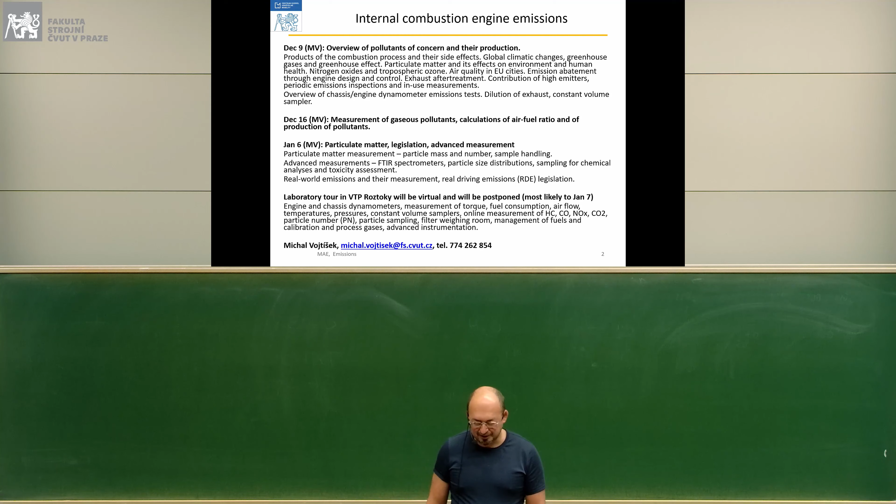Just for an overview, third lecture will be after the holidays on January 6th on advanced measurement, particulate matter, whatever we don't cover today, and on legislation. I am not quite sure how we will arrange for laboratory tour in Roztoky. We will record it on video camera with some commentary and make that available to you, and I will be available for discussion. I don't know where this will be, so please bear with us.

Last time we talked about why do we care about emissions. Since this lecture was recorded, I will not go over it again.

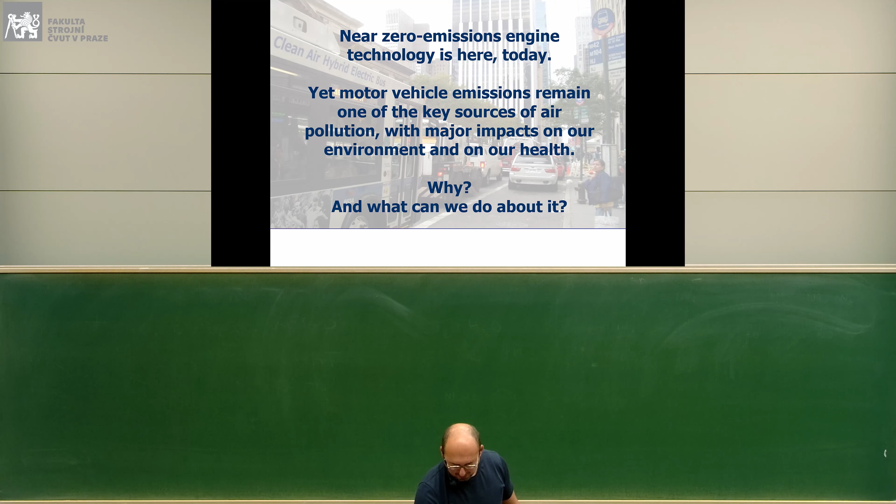Maybe briefly. Particulate matter is responsible for premature death of about 1 out of 1,000 people, with large losses, economic, several percents of gross domestic product.

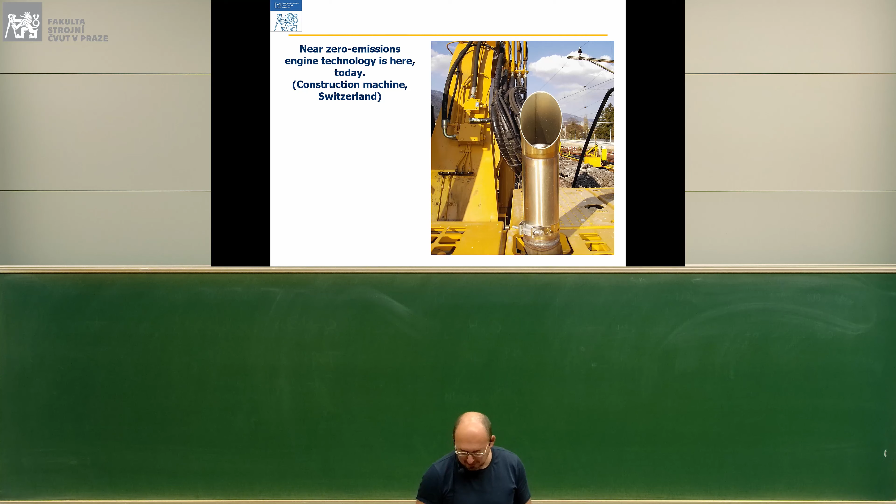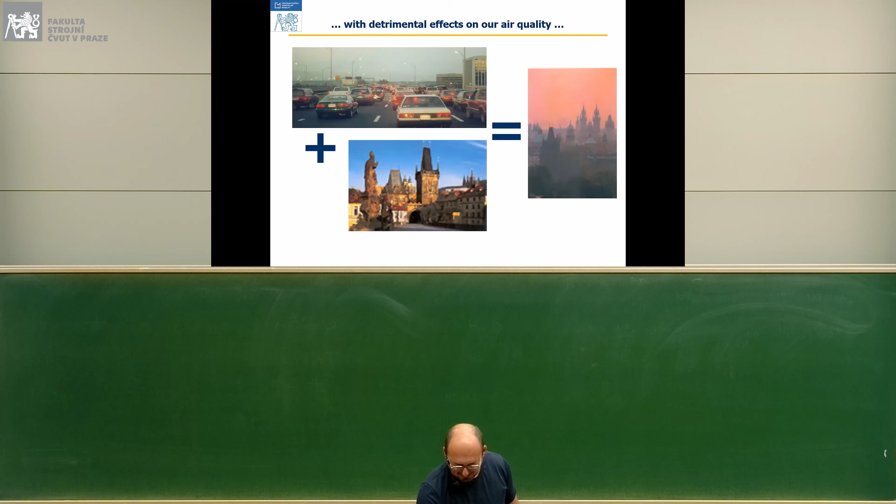And we do have technology that allows us to achieve very low emissions, and we need to make sure that we use the best available technology. We look out for incidental creation of pollutants that could be of concern, because transportation, mobility is part of freedom. It's a useful thing, and at the same time we do care about our health.

The main problematic pollutants are particles, oxides of nitrogen created at very high temperatures and pressures in a combustion chamber, and those are the 2 main categories. Sulfur, sulfuric acid, lead, benzene, CO. They are much less and less of a problem because of technological advances.

We have new emerging pollutants: nitrogen dioxide created in exhaust after-treatment devices, ammonia created during reduction of nitrogen in catalytic devices, new pollutants like aldehydes associated with oxygenated fuels, especially alcohols. And greenhouse gases are not just carbon dioxide, but also methane, produced by engines that run on methane or methane-containing fuels, natural gas, biogas, pyrolysis gas, sewage sludge gas, and also nitrous oxide N2O, which is not harmful to our health. It is chemically very stable, but it is a very potent greenhouse gas, and its production is associated with some NOx reduction catalysts, selective catalytic reduction and NOx trap.

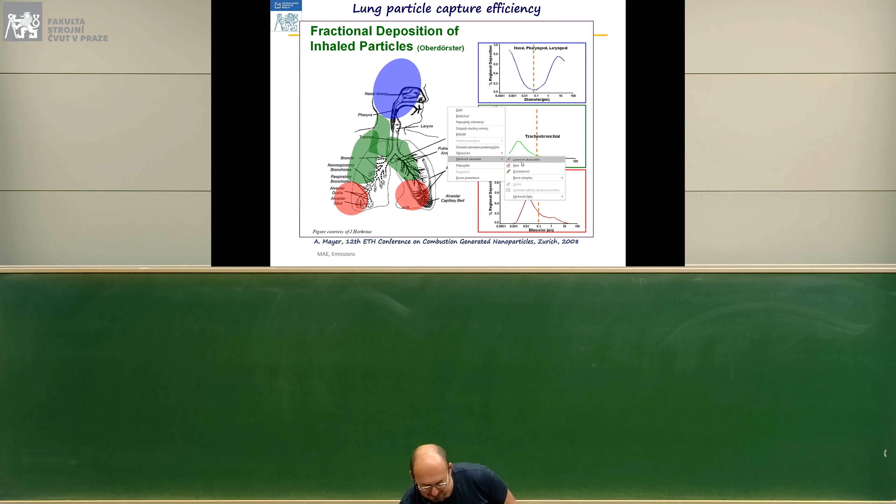Particles produced by the engines are very small, on the order of 10 to 20 nanometers, and then aggregates of larger particles, and that size deposits very readily in human lung alveoli. That's why small particles are dangerous.

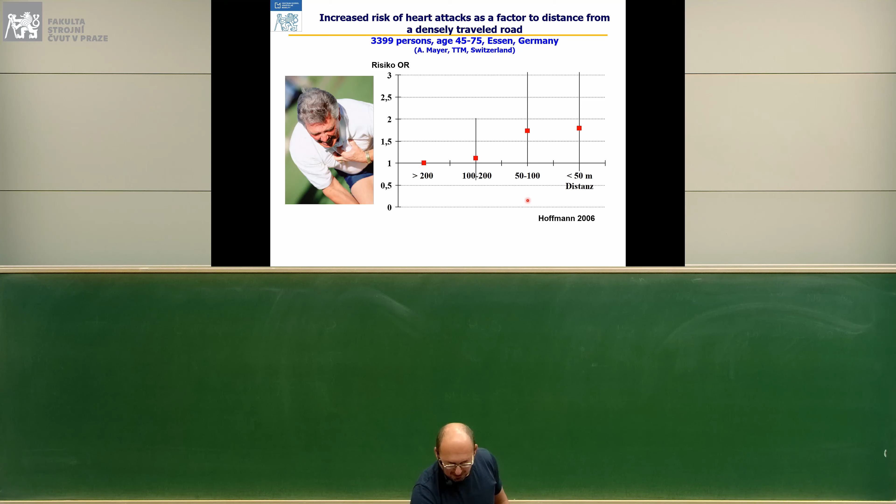Emissions are usually concentrated within tens, maybe hundreds of meters from heavily traveled roads, and those who are frequently near heavily traveled roads have higher risk of various ailments.

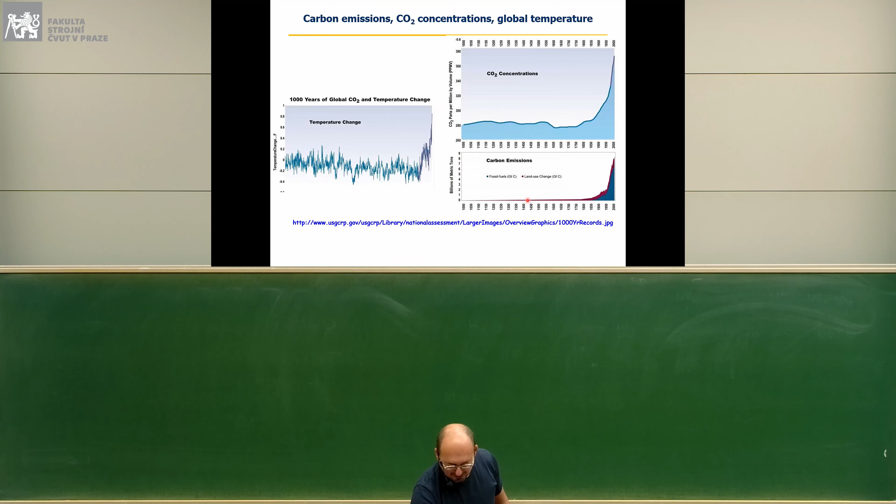Greenhouse effect, rising CO2 concentrations, greenhouse gas emissions, fraction of transport. So, reduction by better fuels and technologies.

Just a review, we run mostly on hydrocarbon fuels, so ideal combustion results in carbon dioxide and water. In reality, incomplete combustion or incomplete oxidation of fuel and lubricating oil leads to particulate matter comprised of elemental carbon and other solid particles, volatile and semi-volatile particles, sometimes referred to as organic carbon, and then we have volatile organic compounds in gaseous form termed hydrocarbons.

I would not call them unburned hydrocarbons because they are not just unburned fuel. They are a mixture of unburned fuel and various intermediate products of combustion, oxidation, pyrolysis of fuel. Then we have carbon monoxide.

Besides the engine burning fuel and lubricating oil, whatever else is in a fuel comes out in the exhaust. Whatever comes into the engine has to leave the engine, or it deposits in the engine, but that causes a lot of problems. So if we have metals and sulfur in a fuel and oil, it comes out through the exhaust, most of it.

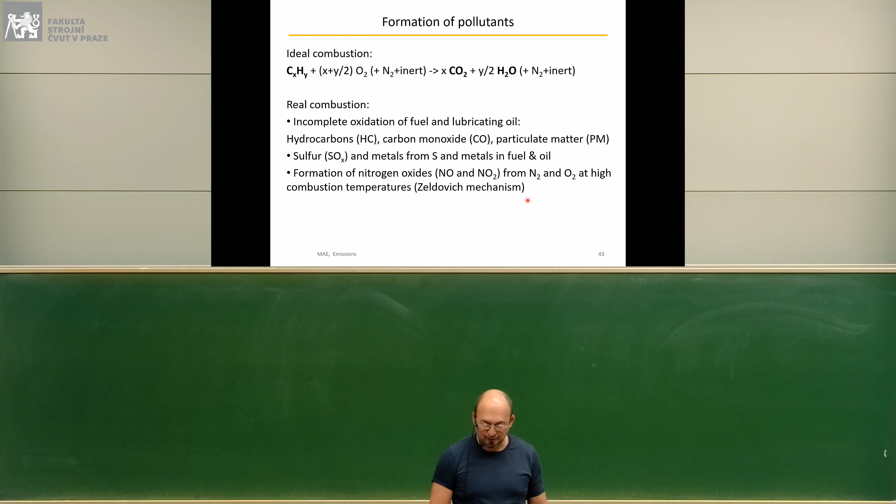That can change in engine after-treatment. We also discussed greenhouse gas emissions, CO2. CO2 is emitted no matter what hydrocarbon fuel you burn, whether you burn biodiesel or petroleum diesel. I exhale CO2. The difference between burning fossil fuels and renewable fuels is that with renewable fuels, CO2 gets taken from the atmosphere, it's bound as hydrocarbons in the plants, and during the combustion of biomass, CO2 is released, but it's a part of natural circulation of CO2.

Also, all the minerals that are in the plants, if the ash is returned, can be used as fertilizer, and leftover biomass could be used for heat, and you have a circular economy.

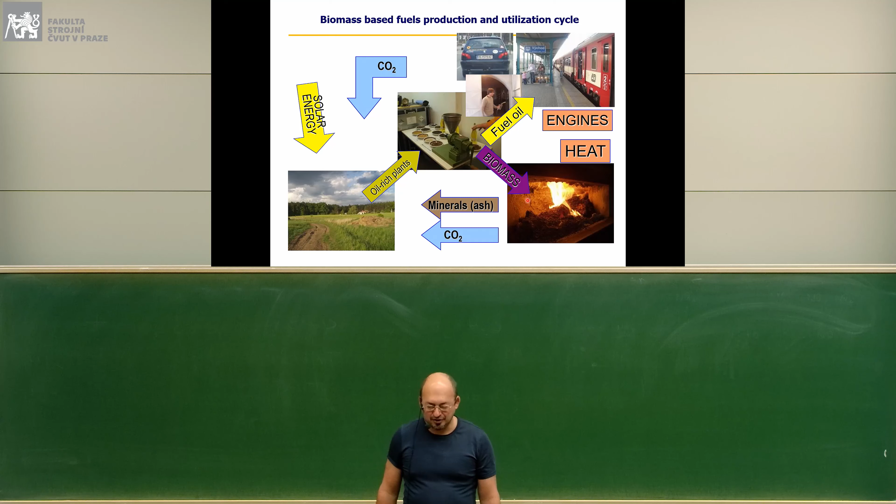Unfortunately, there is not that much land to supply us with enough biofuels that could replace our diesel fuel, maybe on the order of 10%.

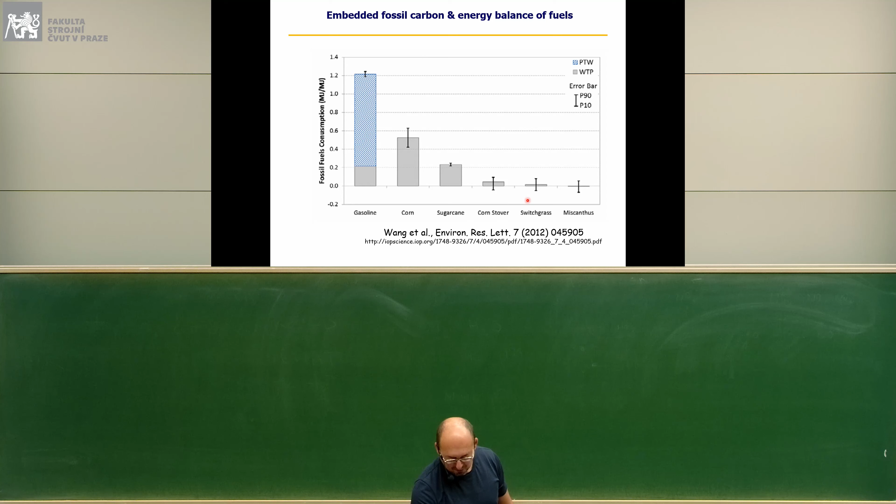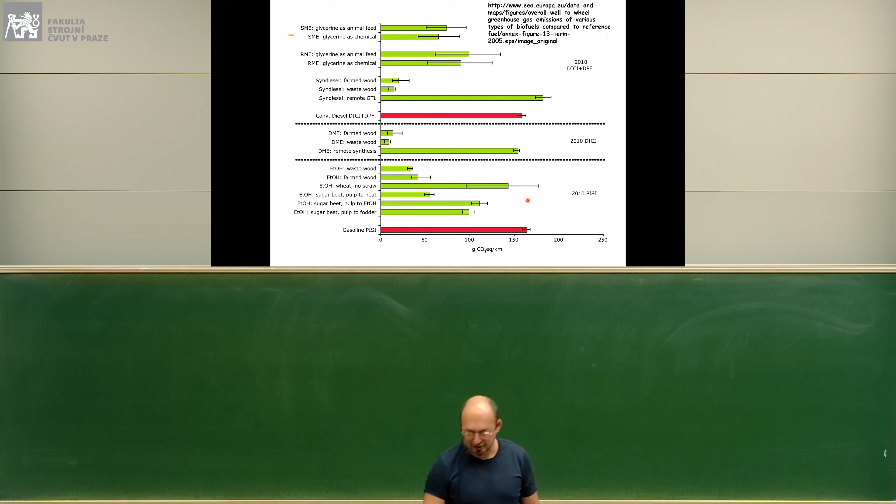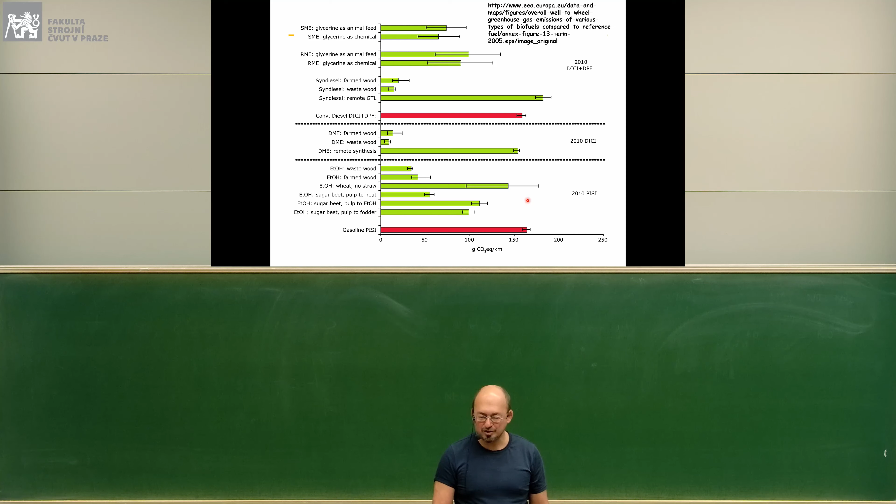We've talked about embedded energy in the fuels and well-to-wheel analysis of different biofuels. It's a subject of ongoing research, and the results are not very consistent. It is not a function just of a biofuel, but from what crops you produce that biofuel, by what process and under what conditions. And that results in tremendous differences.

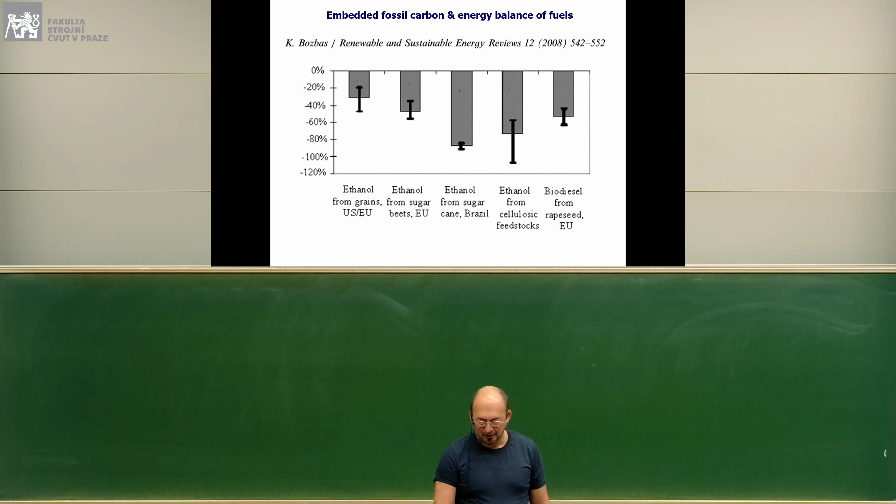But generally it is possible to produce both biodiesel and ethanol with net benefit in greenhouse gas emissions. Not always, you have to watch it.

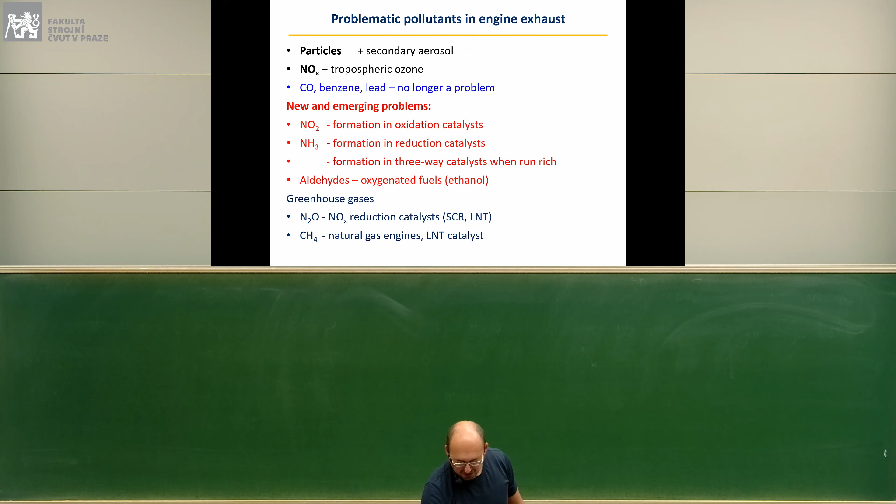So, emission reduction. The first great emission reduction was thanks to a three-way catalyst, and that was on gasoline engines in the United States. Those engines have produced more nitrogen oxides per mile or per kilometer than automobile diesel engines with no exhaust after treatment whatsoever. And those nitrogen oxides got very successfully reduced.

So in a three-way catalyst, we have hydrogen, which is in the exhaust, we have hydrocarbons, we have carbon monoxide, and then we have oxygen that's left in the exhaust, and then we have nitrogen oxide. And what happens in a three-way catalyst? Nitrogen oxides are reduced back to nitrogen and oxygen. That doesn't happen just as a magic by itself. It doesn't happen voluntarily. Actually, what happens is nitrogen oxides release nitrogen, and this oxygen is used to oxidize hydrogen, hydrocarbons, and CO. You get CO2 and water.

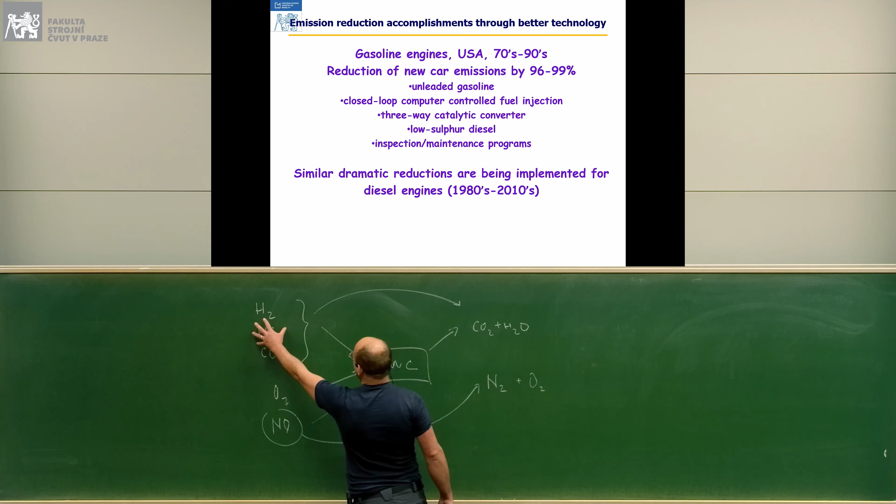So there are many processes happening. It spans hundreds of reactions. To simplify this, hydrogen, hydrocarbons, and carbon monoxide are oxidized to carbon dioxide and water. Nitrogen oxides are reduced back to nitrogen, and oxygen from the air is also used to oxidize hydrocarbons, hydrogen, and carbon monoxide. Now, very much depends on the stoichiometry

of the three-way catalyst. If there is no oxygen, well, after consuming all the oxygen from nitrogen oxide, I don't have enough to finish the oxidation of hydrogen, hydrocarbons, and CO. So, under rich conditions, we get hydrocarbons, CO. Most of the nitrogen oxide is reduced, but nitrogen is also reduced to ammonia. So we have a new pollutant that is being created under rich conditions.

Under lean conditions, these nitrogen oxides need something to be oxidized to take this oxygen away. So if there is not enough hydrocarbons and CO to take the oxygen away, some of the nitrogen oxides do not get reduced. So we have excess nitrogen oxides.

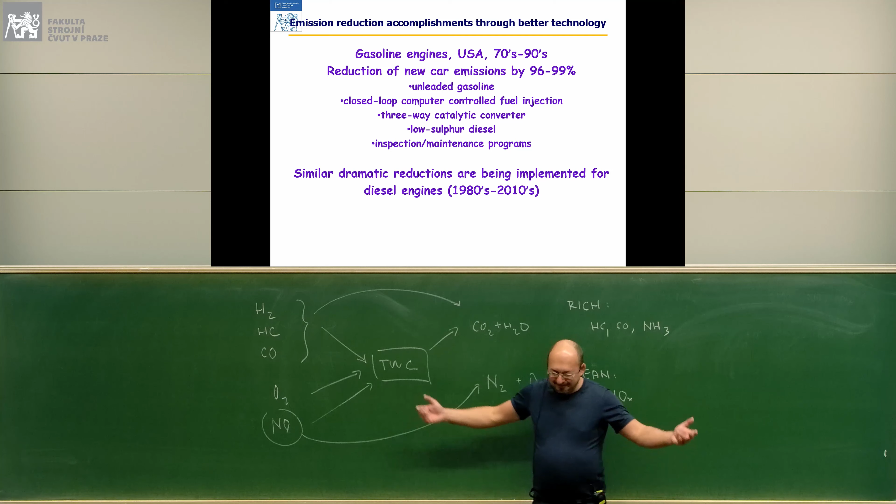What does it mean? What are the practical implications for testing? Well, we need to cover the regimes when the catalyst is cold, at the start of an engine, because a cold catalyst doesn't work. We also need to cover transient operation, during which you can depart from stoichiometric air-fuel ratio. Under steady state conditions with a warmed up catalyst, well, that's not as difficult to achieve very high efficiency. So cold starts and transient operations are challenging for design of such a system.

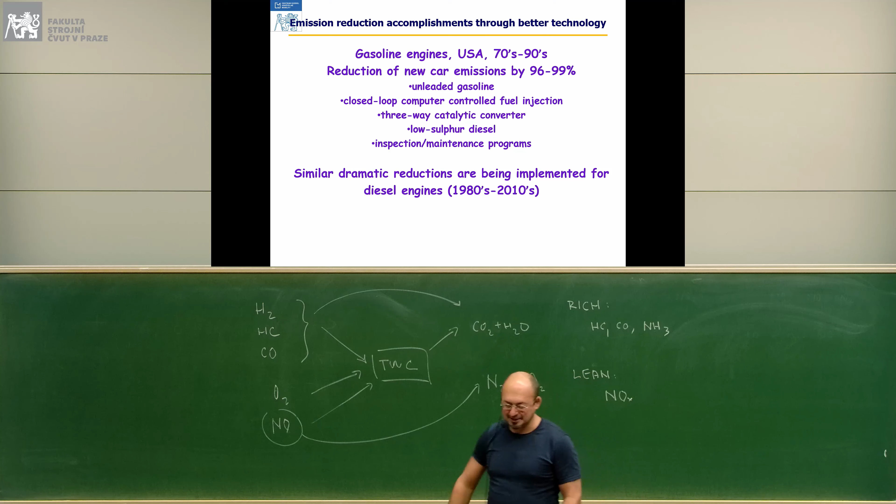And then in use, you have to make sure the air-fuel mixture is stoichiometric and the catalyst is working. And that's why we have inspection and maintenance programs. That's why we have remote sensing that's measuring emissions of vehicles as we go. Now, similar things are happening with diesel engines.

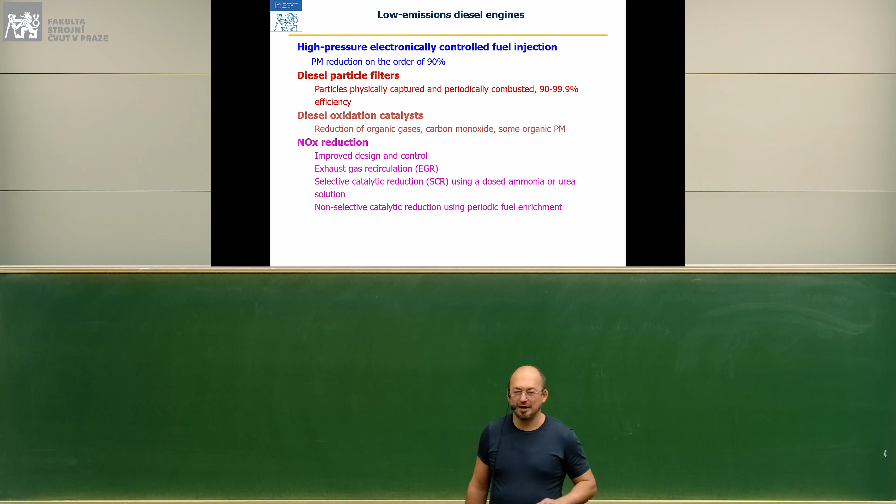With nitrogen oxides, we reached the limits of combustion control without unreasonable fuel penalties, and now most modern engines use after-treatment: non-selective catalytic reduction, NOx storage and reduction catalyst, and selective catalytic reduction using a reducing agent, most likely ammonia. So far, most likely that ammonia is created by thermal decomposition of urea in the exhaust.

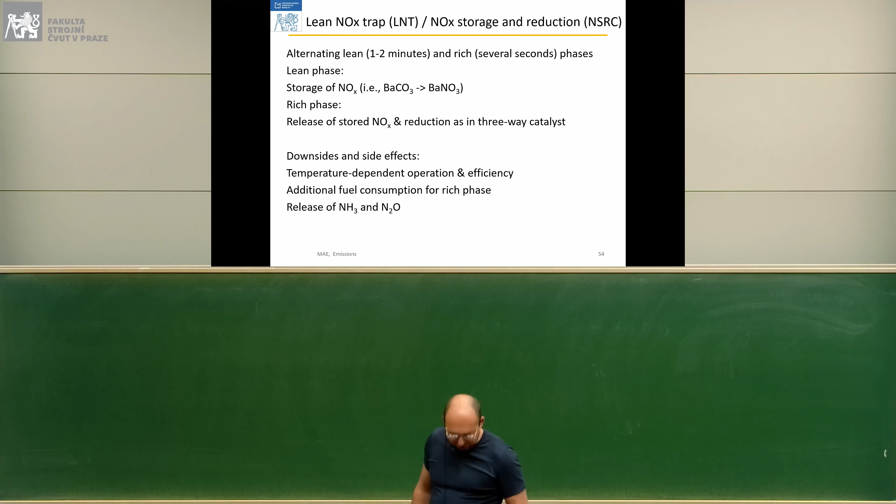Other solutions are emerging. We have lean NOx traps as one of the means to reduce nitrogen oxide emissions, and those function like a combination of a three-way catalyst and a NOx storage. NOx storage is accomplished by chemical transformation. For example, barium carbonate, which is in the catalyst, is changed to barium nitrate.

NOx is captured and CO or CO2 is released, and that's during the normal lean burn operation of the engine. Periodically, you have to do something with the nitrogen oxides you have stored, because otherwise you would reach the storage capacity of the catalyst, and that's it. It's just like when you are wiping up water or coffee you spilled with a rag, and periodically you have to wring it to remove the water, otherwise it's not efficient.

So periodically you run the engine rich. What happens is you increase exhaust gas temperature, there are high concentrations of carbon monoxide in the exhaust, and under those conditions NOx are released from the storage, barium nitrate turns back to barium carbonate, and NOx are reduced by excess CO and hydrocarbons and hydrogen, just like in a three-way catalyst.

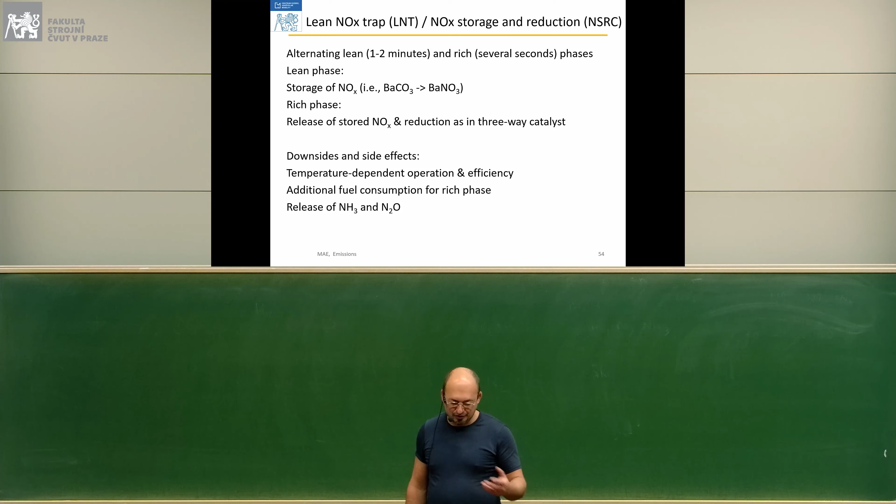There are some side effects, some downsides. One of them is increased fuel consumption. You need extra fuel to create rich conditions to reduce nitrogen oxides. Also, ammonia and nitrous oxide can be produced.

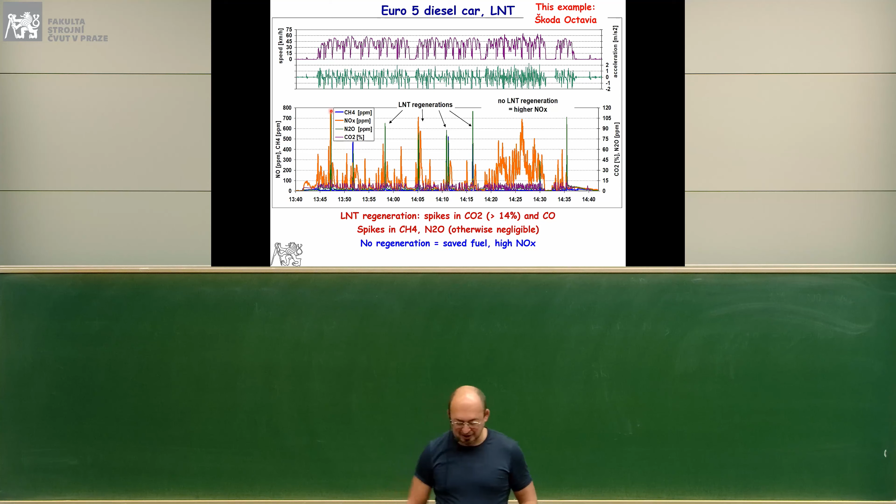You can see during regenerations you have peaks of carbon dioxide during fuel-rich operation. You also have peaks of methane. Unburned fuel is oxidized to CO2 and water, but methane is not, because it requires a higher temperature to be oxidized than the catalyst provides, so you can see spikes of methane. You can also see spikes of N2O, nitrous oxide, that is created during regeneration. And here, there you have regeneration.

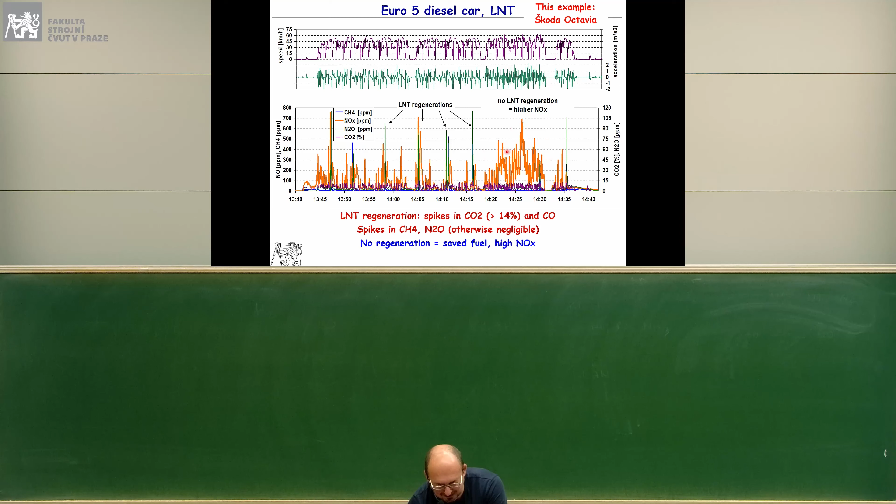Now this shows more dynamic driving, not higher speed, but higher dynamics. You see more decelerations and accelerations, maybe even a little more towards moderate than mild accelerations. And regeneration of the lean NOx trap does not take place here. You can see the emissions of nitrogen oxides gradually rising until regeneration again.

Selective catalytic reduction is an old, well-known process from stationary combustion control. Selective catalytic reduction means it reduces what you want to reduce without much reaction with something else, and that happens with a reducing agent, which in this case is ammonia.

Ammonia can be stored in liquid form and metered into the exhaust. It can also be stored absorbed in some material in solid phase and released by heating it up. Ammonia can also be produced in a three-way catalyst under fuel-rich conditions, but the easiest way used so far is to use water urea solution, which is liquid until about -10 degrees C.

When you inject water urea solution into the exhaust, it decomposes first through isocyanic acid, which then decomposes to CO2 and ammonia.

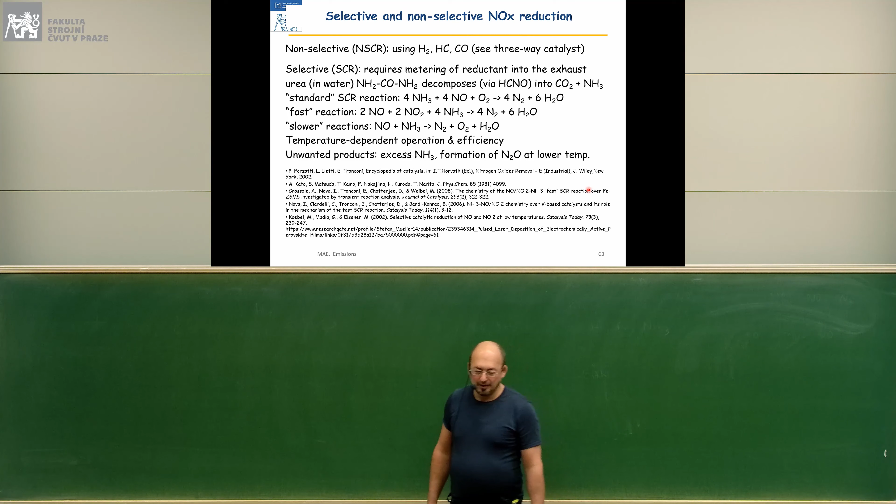So you have an engine with exhaust, a diesel oxidation catalyst, diesel particle filter, then metering of urea, or urea water solution known as AdBlue - that's a commercial name, and in the US they describe it as diesel exhaust fluid. And then you have an SCR catalyst.

In an SCR catalyst, many reactions are happening. To simplify this, ammonia reacts with nitrogen oxides: ammonia is oxidized, nitrogen oxides are reduced. The fastest reaction is when you have roughly the same amount of NO and NO2, and other reactions involving just NO or just NO2 are considerably slower. So it is beneficial to have higher concentrations of NO2 coming into an SCR.

You have to be very careful about chemical balance. If there is not enough ammonia, you have unreduced nitrogen oxides coming out. If you have excess ammonia, then you have ammonia coming out. Sometimes, because nothing is ideal, at a balance point you get some nitrogen oxides unreacted and some ammonia slip. And under some conditions, on some catalysts, you have nitrous oxide.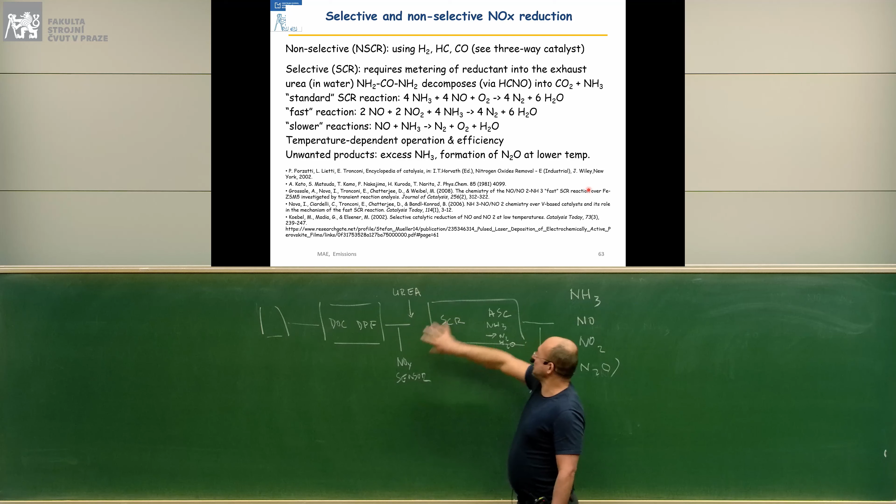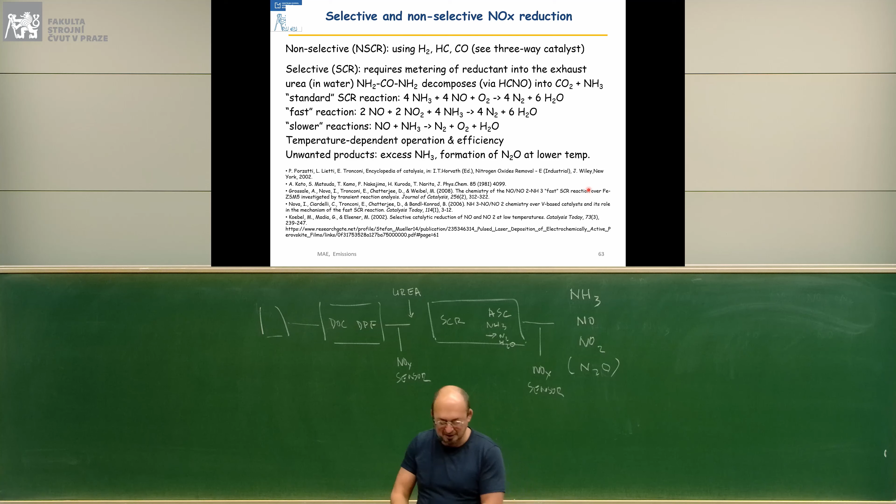This is the typical heavy-duty diesel engine after-treatment: diesel oxidation catalyst, diesel particulate trap, urea injection, selective catalytic reduction, ammonia slip catalyst. This allows you to reach very low emission levels, maybe even lower than on most passenger cars that drive on the road today.

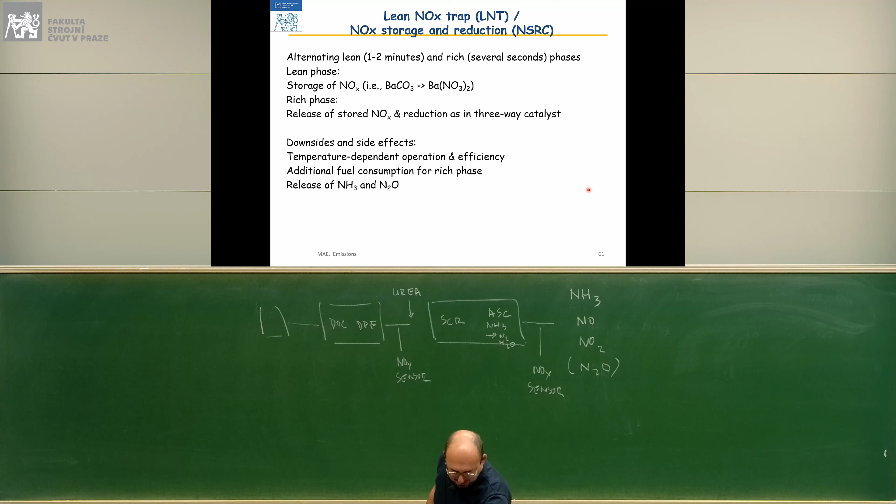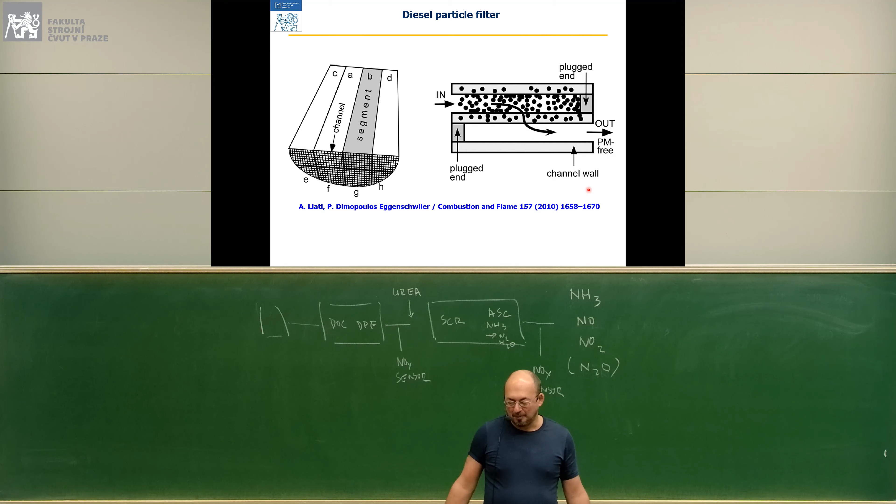And then we have the diesel particle filter, where you have channels just like in an oxidation catalyst, but those channels are capped on one end or another. So through the inlet channel, particles come in, and on the outlet channel, clean or particle-free exhaust comes out.

This is how it looks under an electron microscope. What's called a soot cake is a layer of carbonaceous particles that are trapped by the filter. So the particles are not trapped as much in the body of the filter, in the porous walls, because the pores in a porous wall are much larger than the particles. It's just like when snow is falling on a grid of a manhole on a sidewalk.

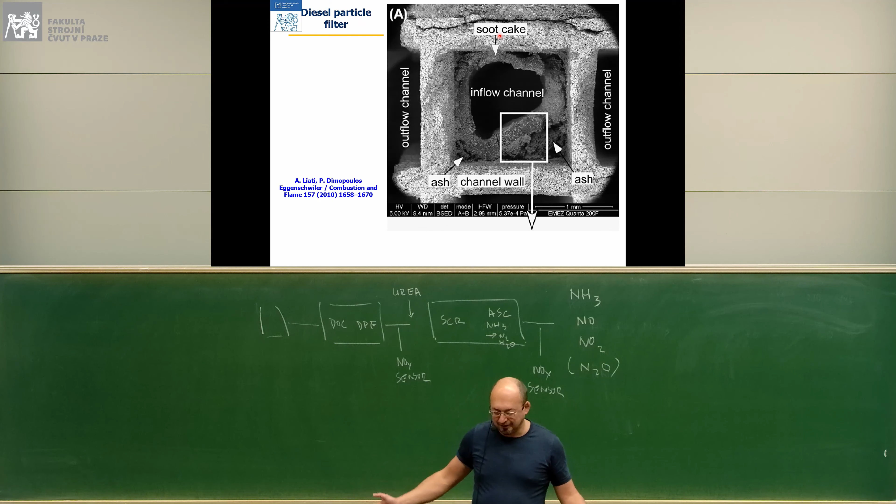The snowflakes are smaller than the openings, but as soon as a layer of snow builds up, then that's it - the filtration is almost absolute. During that time, the concentrations in a vehicle exhaust of particles - this is multiple runs with a heavy-duty truck just outside of Prague, about 8 years ago - are even smaller than the background urban concentrations. When we left this truck with the engine off, but with the analytical instruments still on during lunch, for that period the particle concentration measured was about an order of magnitude higher, because the instruments were sampling from the exhaust, so outside air was drawn into the tailpipe.

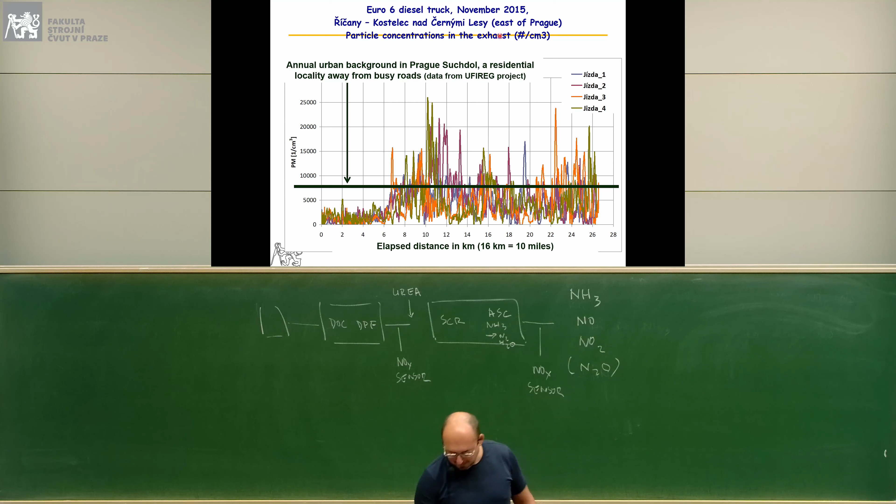So, very efficient device.

This is an example of data from a city bus driven for about 45 minutes, Braunschweig cycle with some breaks - high NOx only until SCR is warmed up, after that NOx is very low. You can see some increased emissions of N2O, but generally you have units of milligrams per second. So imagine milligram per second - that's less than 100 milligrams per minute. You're on the order of 100-200 milligrams per kilometer for a city bus.

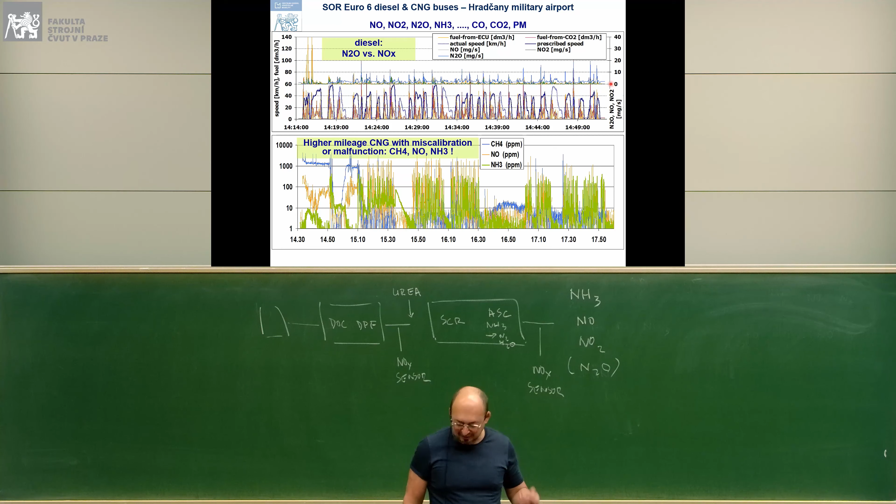Doesn't work all the time. We took a tractor trailer fully loaded, and for one week we drove it around Prague to look at the effects of congested traffic.

When the exhaust temperature drops below roughly 200 degrees C, the urea no longer decomposes in the exhaust, so no ammonia is produced. It's better to stop the injection of urea, and the catalyst efficiency starts dropping.

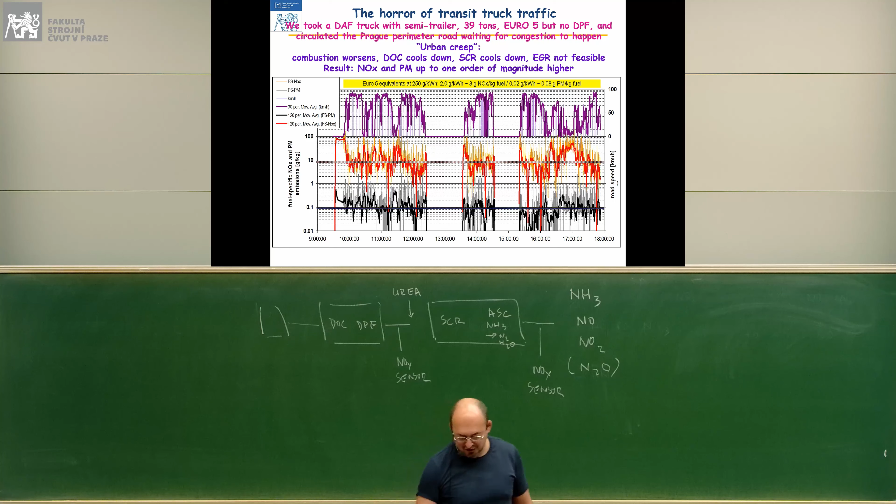Then NOx emissions per kilogram of fuel drop down an order of magnitude, but periodically they increase when average speed decreases, or after the lunch break when the catalyst is cold, and during driving through heavy congestion. So that's a technical limitation of SCRs.

When you think about what testing conditions you need to see if those technologies are working, you have to know something about those technologies, how they work. Cold start of an engine, low load operation, and transient operation need to be covered during any test to meaningfully assess whether this device is working under realistic conditions. If it's working under those conditions, it will also work under ideal conditions.

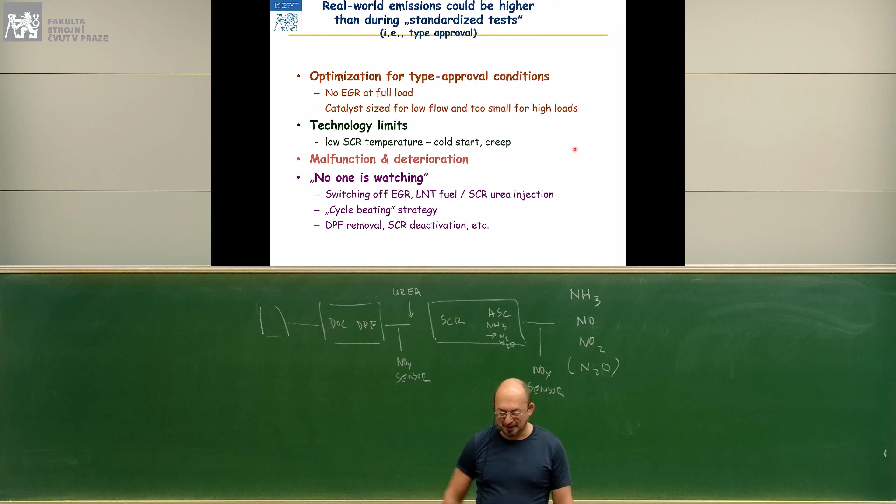By the way, operation of a heavy-duty truck at highway speed is not steady-state operation of the engine. If you don't believe me, ride with me on a truck one day. Even very slight variation of speeds requires either using full engine power or no engine power, and the speed doesn't change that much. So it's not steady state operation as people might think.

Now, when we look at our diesel cars, the results are not that good. Most Euro 5 cars under realistic driving produce more nitrogen oxides emissions than during a type approval test, and the same goes for a lower but still considerable portion of Euro 6 cars.

This is the reason why this was investigated, and we have what's known as Dieselgate, because some of it resulted from intentional adjustment or calibration of the engines by the manufacturers. Now, this is not a new thing. It is not that US EPA doesn't like European auto manufacturers. US EPA doesn't like anyone who cheats on vehicle emissions.

This is an example from 16 years ago, of NOx emissions of a heavy-duty truck. You have accelerations, cruise, and during cruise you can see that under some conditions NOx emissions are increasing over what they are under more favorable conditions, where those are very slight variations of the truck operating conditions, a very slight incline, and it produces higher NOx emissions. Well, that has to do with the engine control unit looking: am I being tested for emissions?

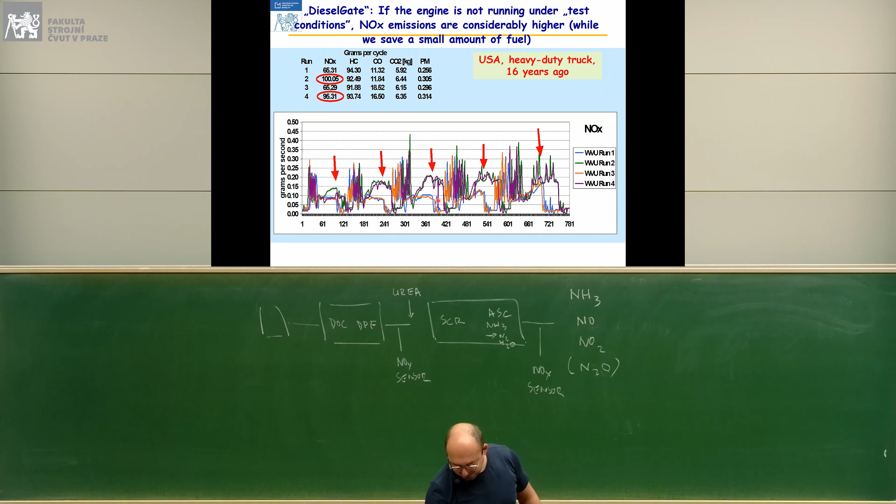Am I not being tested for emissions? Oh, I am not tested for emissions, so I will save a little bit of fuel at the expense of a very high increase of nitrogen oxides.

Well, that increase of nitrogen oxides, unfortunately, is associated with very severe damages to human health. This is from Professor Nino Kunzli from Basel, Switzerland, with reference to a Nature paper by Susan Anenberg. So those are people who have very carefully reviewed what they are saying.

They claim that the global consequences of manufacturers circumventing emission regulations are about 38,000 premature deaths every year. That's a fairly high number.

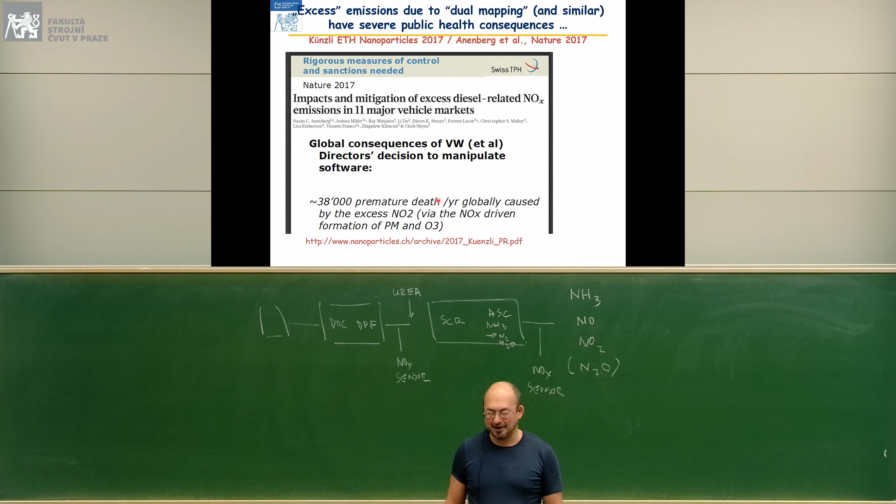And as a result of that, if the member states of European Union don't do anything about this, well, what can the cities do? The cities will say, well, obviously the emission standards do not work because they are being circumvented, and not much is being done to repair this.

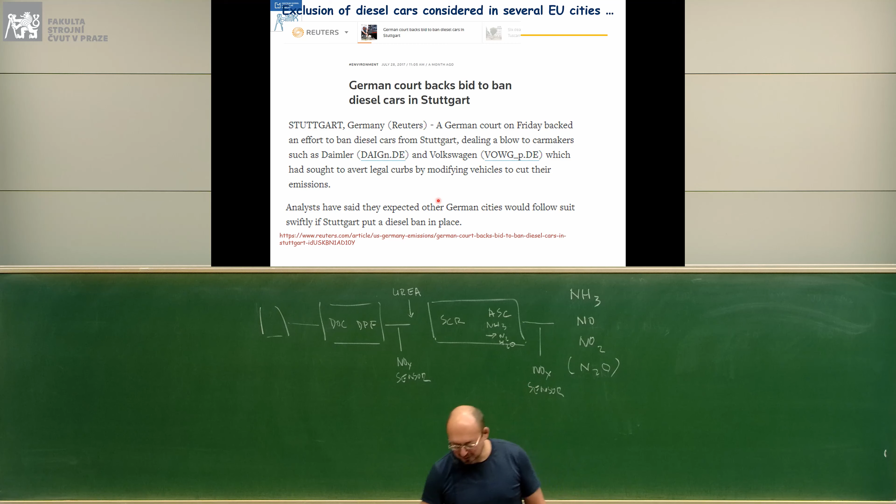Well, then what is the result? What can a city do? The city cannot pass new emission standards, but the city can close the road to traffic. Some cities are saying, hey, you are not able to keep your emissions low, well, the only thing we can do is ban cars or certain types of cars from the cities. So if we don't take care of our engines, it could be that we will not be able to operate them in many cities.

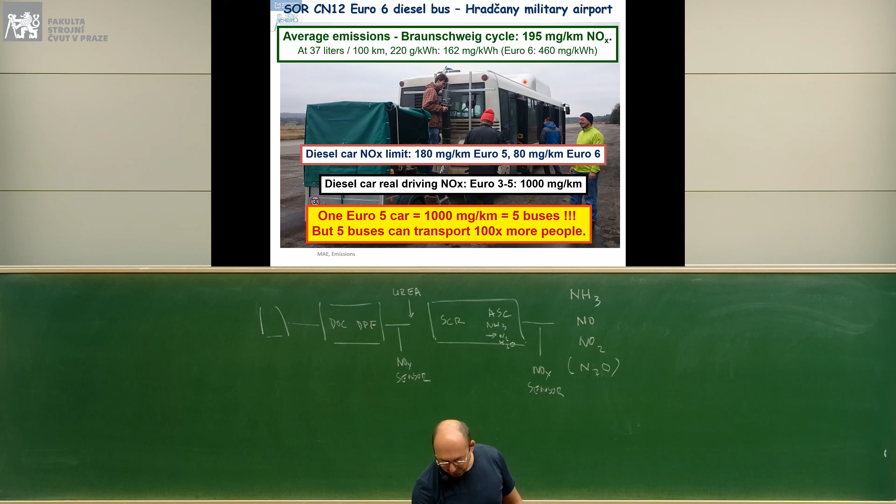When we tested this bus's diesel counterpart for reference at the airport, we found that bus emits about 0.2 grams per kilometer NOx, which is much better than most Euro 3, Euro 4, Euro 5 cars per kilometer, roughly comparable with Euro 6 cars per kilometer.

This is real-world performance, not laboratory results. Now, that technology limit is being pushed down even further. In the US, it was proposed that the current limit of 0.2 grams per brake horsepower hour - and horsepower is 0.746 kilowatts - so 0.02 grams per brake horsepower hour corresponds to about 0.027 grams per kilowatt hour.

And this translates to on-road emissions for trucks and buses, to between 20 and 40 milligrams per kilometer. The current Euro 6 standard for cars is 80 milligrams per kilometer. And there is some tolerance for real driving conditions.

By the way, the current standard for US trucks and buses for heavy-duty engines is stricter than the European standard. It is 0.2 grams per brake horsepower hour, which is 0.27 grams per kilowatt hour, and the Euro 6 standard for transient limit is 0.46 grams per kilowatt hour, which is not double but close to double.

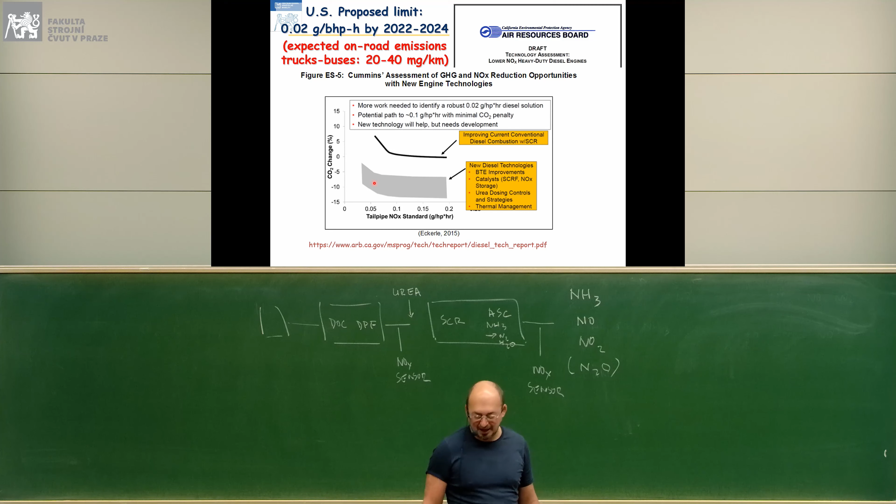This is still under debate, but one thing that is clear is this bus, which you can see, was a good representative. It was pulled from traffic, from regular operation, and it represents the buses going around in Prague, and is maybe the cleanest vehicle in terms of NOx and maybe even particulate matter per kilometer among city buses. It's better than most Euro 5 and Euro 6 diesel cars.

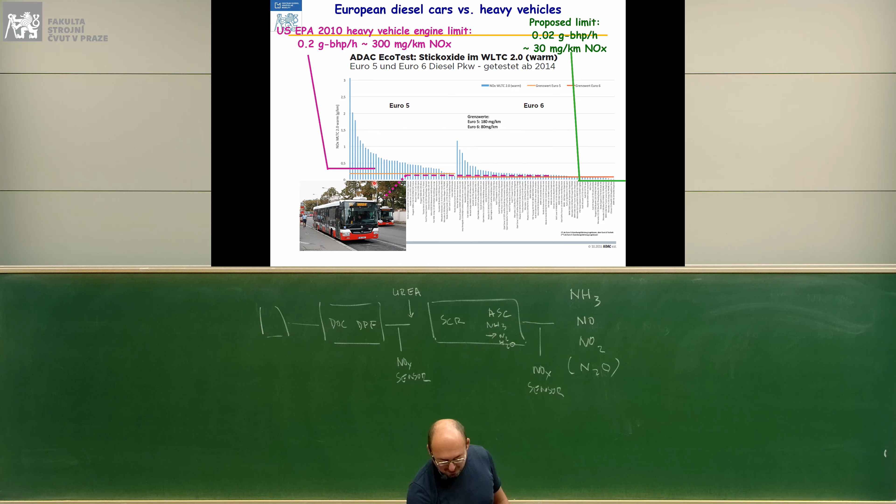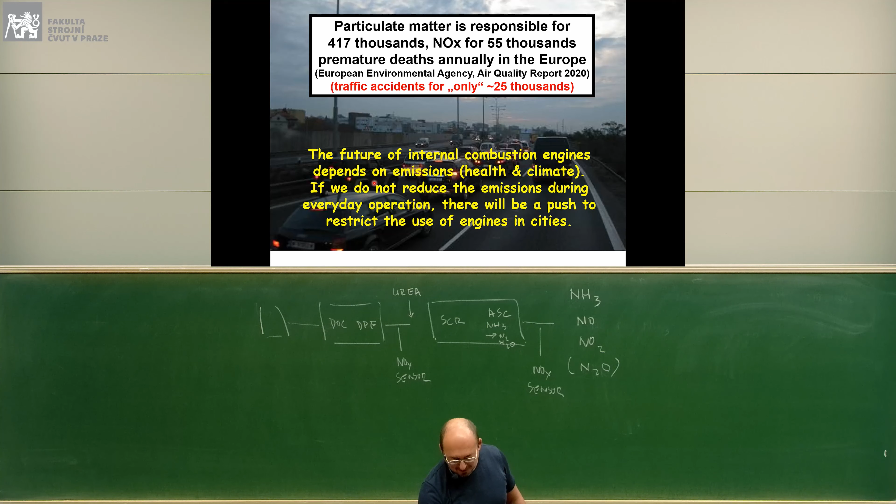So the future of our engines depends on how well we can manage the emissions. We have the technology to do that, and we have to do it to protect human health. If we don't do it, engine use in the cities might be restricted for the protection of human health.

Now, in order to do that, we have to measure, we have to test, we have to know what the emissions are. We need to develop new technologies, calibrate engines. If we have new fuels, new operating strategies, new combustion modes, new types of after-treatment devices, we have to assess their emissions performance. That's why we do research testing on a selected small amount of vehicles in the laboratory for research, for engineering, for type approval.

Then we equip vehicles with onboard diagnostics to diagnose emission problems. Also, we check on those vehicles - do they last so many kilometers or miles? Does the technology hold? Do the catalysts deactivate, or do they perform adequately after 500,000 kilometers?

That testing you do with portable onboard emission instruments mounted in the vehicle you are testing, but also you can have your instrument in another vehicle and drive behind. That's called a chase vehicle. You put instruments in a chase vehicle and you follow the vehicle you are measuring. That's an on-road test.

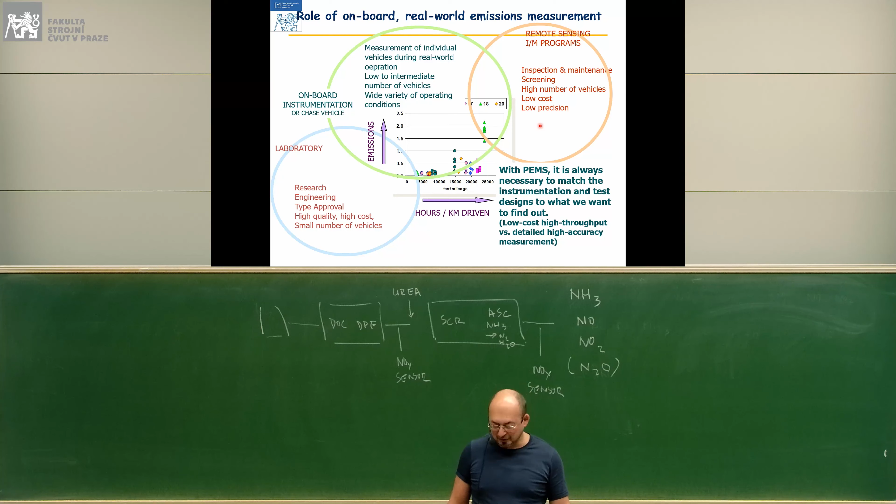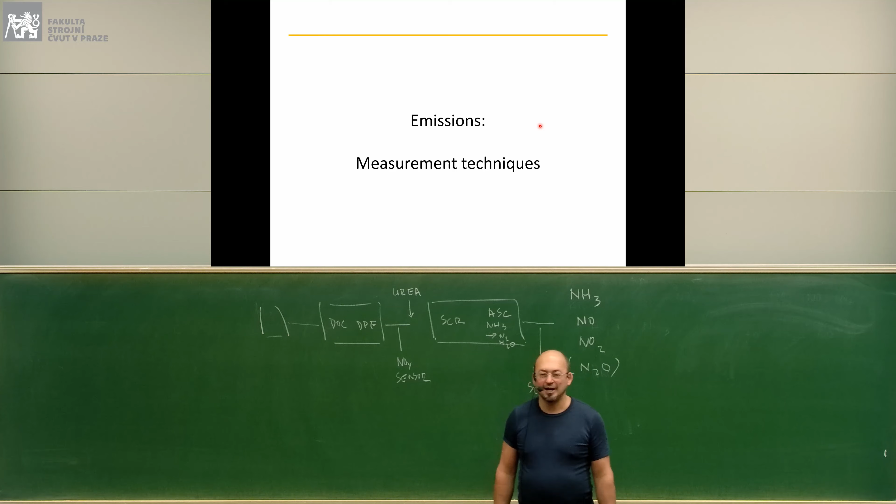So we have to assess, why are we testing? What is the goal of the testing? What do we want to get out of it? And based on that, decide the method and the instrumentation. So during the next part, we will look at the emission measurement techniques.